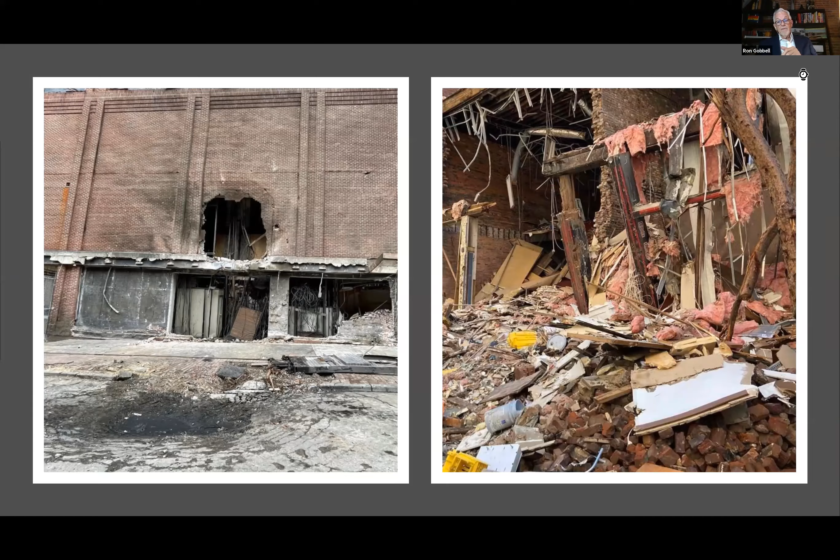Next slide. We've done a lot of work. The property owners, and you'll hear more about this in a minute, are really beginning to get to the terms of what they can do and when can they do it. So there's going to be a lot of things that are coming together.

It's been a little bit over 9 months, and it's a slow process, a lot of damage. So we're continuing to move on. It not only affected 2nd Avenue, but affected 1st Avenue. And again, all of this is coming into play as we start trying to...

Organize how do we make the street better and really make it for Nashvillians. I think the ULI report did an excellent job of articulating that we need a district for Nashvillians.

So next slide. This is the map showing the damaged buildings. Actually, one red building is now turned yellow. So we're making progress. The green buildings are the ones that are essentially back open. Some still have damage. The one I live in still has damage. So every building and every building owner is different.

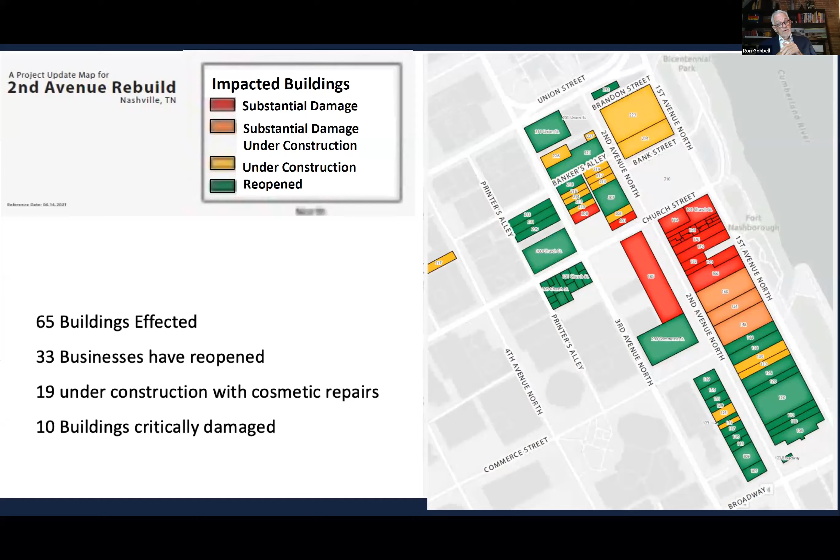And we're making progress out of 65 that were affected. Over half are open, and the construction work is going to be going on literally for the next couple of years. Next slide.

So I think my job is to hand this to Michelle at this point and let Michelle kind of get everybody up to speed. That's awesome. Thank you so much, Ron.

One of the things that I just want to add to what Ron said, the intention for tonight's meeting, we are going to review everything we've heard so far, who we've heard it from, and really show some concepts from the designs for what we're looking at as far as 2nd Avenue, 1st Avenue in the area. So we definitely want your feedback. We'll have a survey at the end. We absolutely want your input. It's really imperative that we hope that everyone is one of the voices that's really going to help shape this area. So we definitely want to share that.

I'm going to go through here real quick, just kind of where we've been so far. So of course, this blast happened on Christmas Day last year. Since then, Metro stepped up pretty quickly and started to conduct some listening sessions. A couple of them where we were really talking to stakeholders, those directly affected, the business owners, merchants, residents.

Occupants of those spaces - those are the folks we're going to call, you're going to hear us refer to them as the stakeholders. We've spent a lot of time and will continue to spend a lot of time talking to them as we refine what worked and what they would like to see in future designs for the streetscapes. We've also talked to the public a number of times, including work sessions.

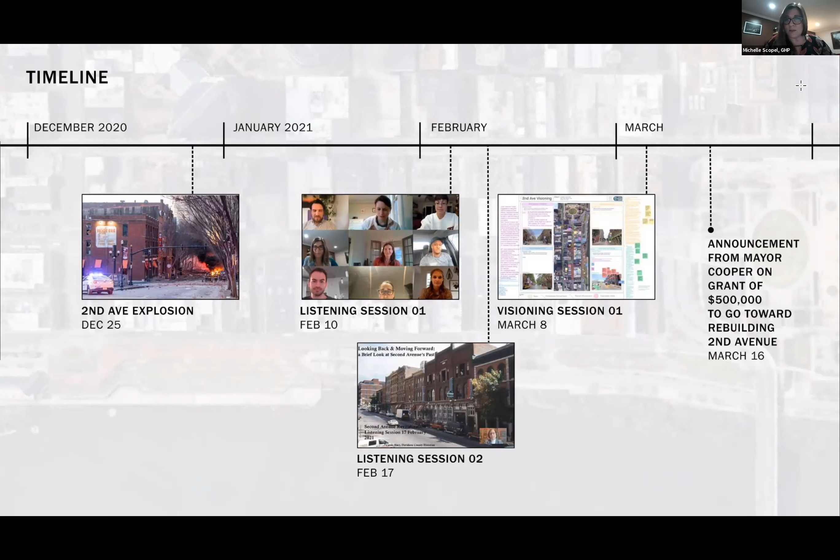It was pretty cool. Also, the mayor pretty quickly provided a grant of $500,000 to help in the beginning stages of the recovery efforts. That's something the mayor's office administration has done. We've had tremendous support from all departments, all stakeholders, council members. Everybody's really been great to work together. The desire here is strong for Second Avenue.

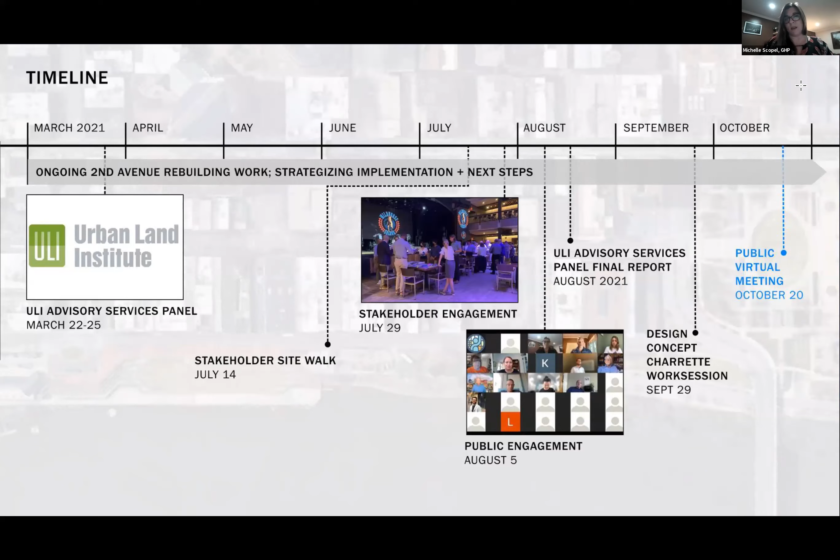So we've held several other meetings. We've done site walks, in-person meetings, more virtual, hybrid, public versus stakeholders, design charrettes. This is actually our 9th meeting since February. So we've heard from a lot of folks.

This is what some of these meetings have looked like, just FYI. If you've been a part of it, we're really thankful for that. A lot of it has been virtual. We've had a media tour so we could help provide a better idea, shed light on what's going on in the conditions of the site.

We've spent time walking up and down the site with the design team and the stakeholders to really hone in on those specifics. A lot of in-person workshops, hanging over drawings, looking at some of the concepts and trying to find out what works and what could be better. So these ideas have really gone towards—we're starting to put that on paper.

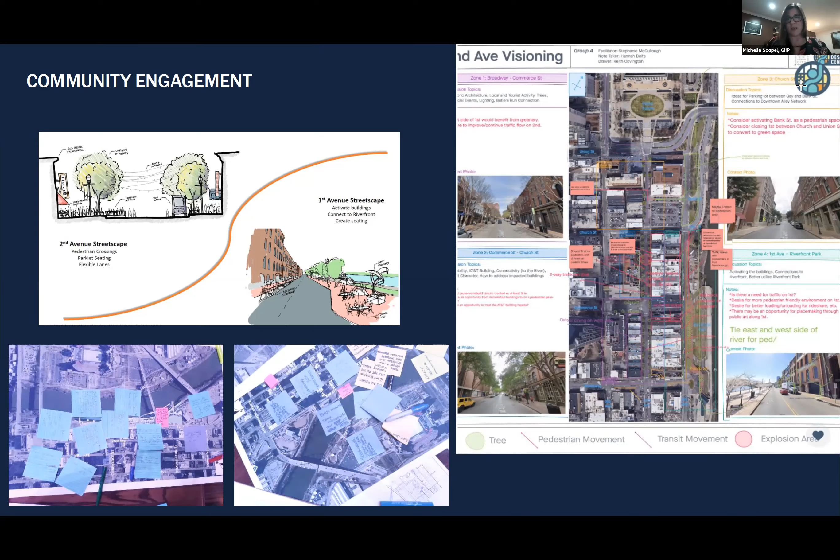It started with Post-it notes and locating areas for improvements along Second Avenue and First Avenue. You can kind of see how the evolution of this is going. We're hearing some messages really loud and clear.

We're really hearing a strong message that people do not want this to be like Broadway. Broadway is great in its own sense, but there's not a desire to expand that up on Second Avenue. People want Second Avenue to be a neighborhood, to have that feel and have a space for the local folks. So the more connection, the better.

The buildings are really deep—try to find something that adds interest along the way. Activate. Lots of ideas and lots of desire to connect to Riverfront and the river with an arcade. So we'll talk more about some of that, but these are some of the things we've been hearing along the way. Eric, do you want to dive into some of the data?

Yeah, gladly. Thanks, Michelle. I'm Eric Hoke, the design director at the Civic Design Center, and we've been helping with a lot of this community engagement effort over the past few months here.

So as was mentioned, this will be our 9th event. We've had over 500 people participate, and that's not even including everyone here today. And then 40 or so, probably more than that even now, business owners and stakeholders and directly affected residents—some of the people who have been involved with the results.

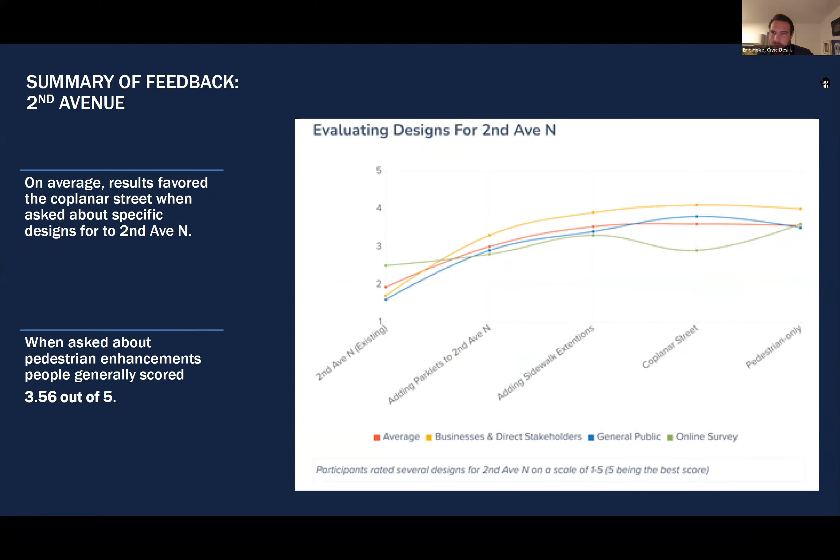So looking at how that related to when we showed actual designs as it related to Second Avenue, people tended to favor the coplanar or shared street example. It was on average the most popular. So it's interesting how we take inspiration from other cities, but when it comes to our street in particular with Second, that coplanar street was the most popular.

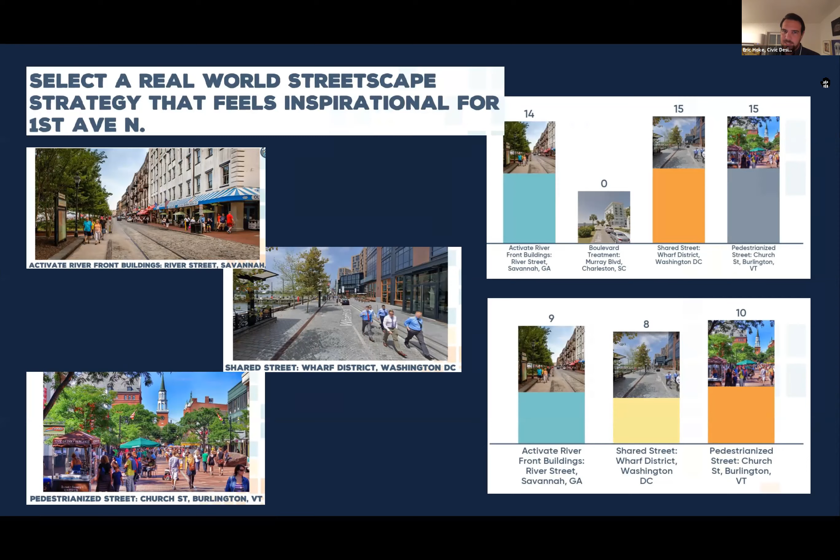And then, so this is a similar slide, but shows the data related to that. And likewise with Second Avenue, that coplanar street was again the favored design on average as it relates to First Avenue.

So overall, we averaged the scores of the general pedestrian feeling, and on average it was 3.5 out of 5 favoring in total the more pedestrian enhancements. I think that's the main takeaway from all the data: this district was favorable to promote pedestrian enhancements.

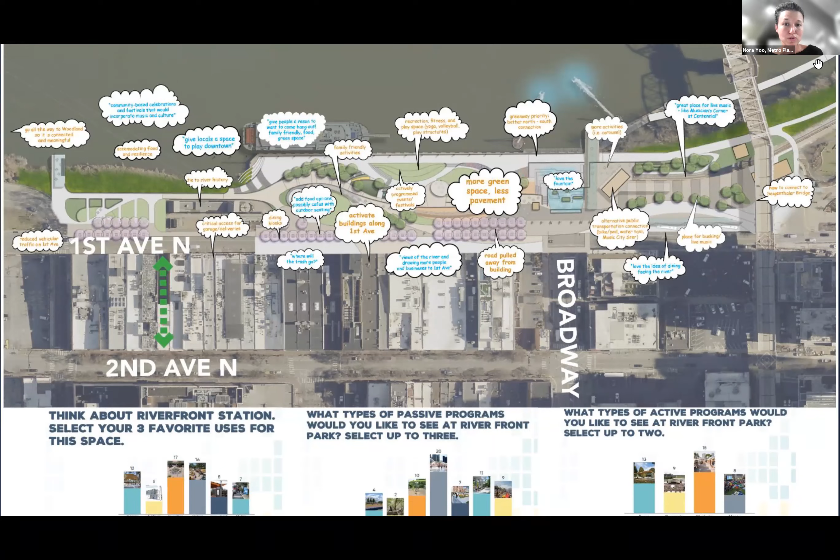So if we go to the next slide, these next two slides were done with our team over at Hawkins Partners, which was great. They helped compile some of the information and feedback that we have heard and overlaid it on these two maps. This one is showing feedback that we had heard on First Avenue and the riverfront, and the next slide shows feedback more based on Second Avenue. But you'll see there's, I think, again, some of the same themes mentioned by Michelle and Eric.

How do we get more green space? How do we make this a space for locals, something of a counterpoint to Broadway? Both the park, the riverfront area, and First Avenue and Second Avenue.

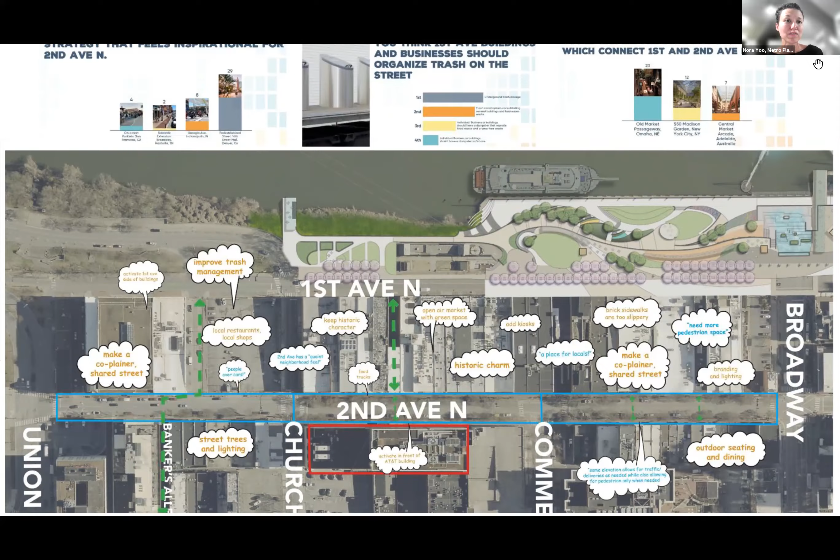That was one big takeaway from ULI: when we talk about rebuilding Second Avenue, it's actually looking at this entire area. It means looking at First Avenue and the riverfront. So we've been working with our design teams on key themes, because when we rebuild the area, we're really talking about a whole district. It's not just this block or these two blocks of Second Avenue, it's that plus the greater area.

These are the key themes that came through both ULI and public feedback. We categorized them broadly into 6 areas: riverfront design, program and activation, and streetscape are the first two, and we'll hear more on those today from our design teams. Then historic integrity, creating connections, property opportunities, and programming and operations of all these redesigned spaces, making them beautiful, well-designed, thoughtful spaces, but also activating them. We understand the importance of that.

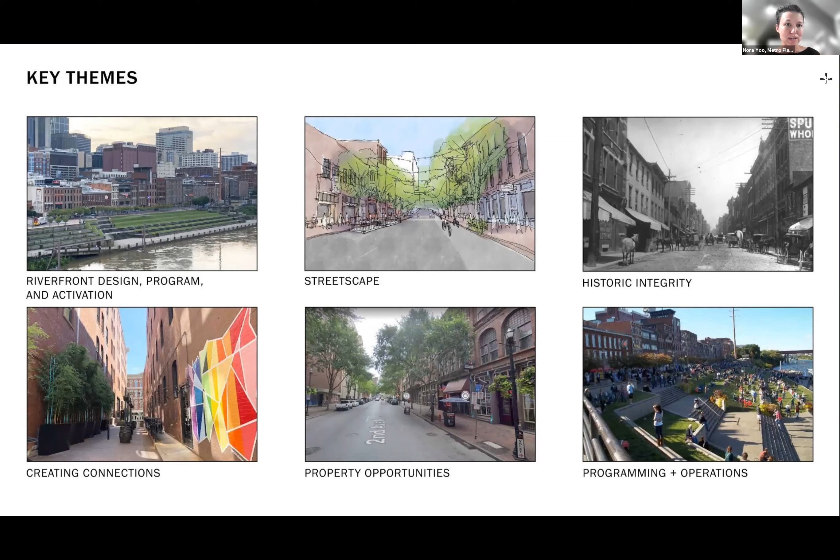Next slide. This shows our key themes, starting to map those out over next steps. We've had GHP leading the effort on immediate reopening efforts, utility work, and coordinating getting the streets back open. But in the mid to long term, this is what we're here for today. We want to talk about the big picture items, broadly put into 3 categories: capital improvements, strategizing and rebuilding properties, and programming and operations.

With the strategizing and building property category, I want to hand it over to Dave Johnston, an architect with STG Design. He's working closely with the owners of properties 170 to 176 Second Avenue, those directly across from the blast. I'd love for Dave to take over and give a brief overview of the work they're looking at as they rebuild those damaged properties. Great, thanks Nora, thank you very much.

Yes, we're pleased to work with the ownership of those 4 buildings. I want to talk today, about 5 or 10 minutes, on what this looks like. Michelle, I think you have the screen.

There we go. So those 4 properties were obviously damaged by the bomb in a significant way, and we can start right there. We know what it looked like on Christmas, and we also know what it looked like across the street, showing the difference between a hardened facility and buildings that were built 140 years ago.

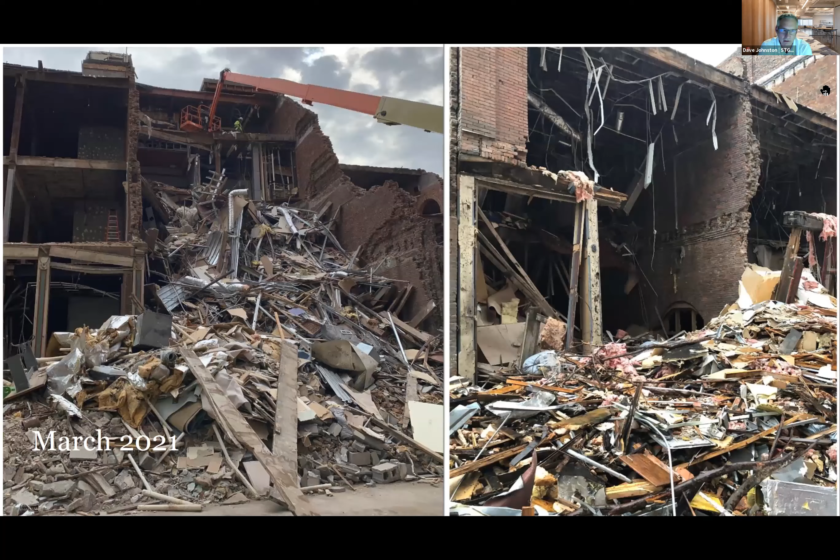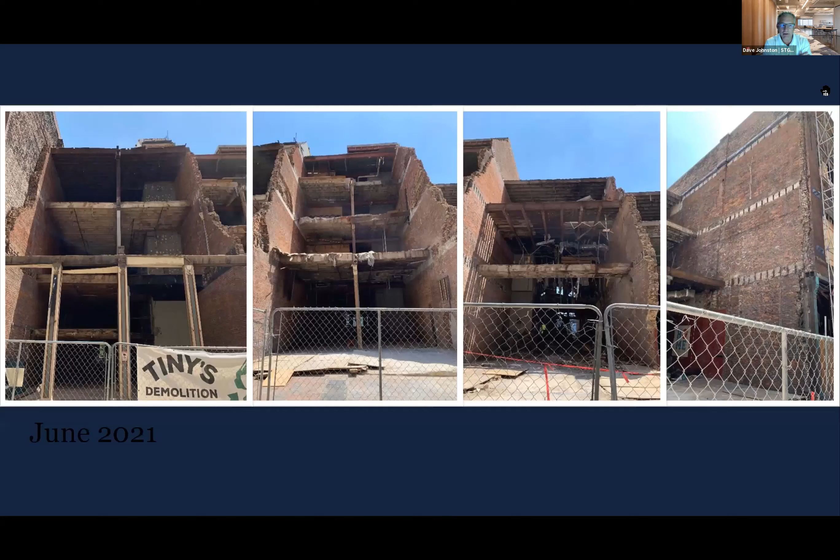Significant impact. The next slide shows what it looked like in March, when all the debris was being removed from those buildings. Keep in mind that under that debris is the rubble remaining from the facades, because they were completely obliterated. Moving forward to June, we see the buildings cleaned out, as Ron showed earlier, and what remained after the bomb impact on the structure itself.

The first thing we need to do is walk through with the Historic Zoning Commission what the next steps are. We met with them a couple weeks ago to talk through how we stabilize the property. There are 3 main components.

The first, the easy piece, is to repair the gutters on First Avenue that were being damaged by water infiltration, so we've repaired those. Second, once we peeled back those walls, we put mortar across the tops of the exposed walls to help stop further deterioration of the masonry from rain and weather.

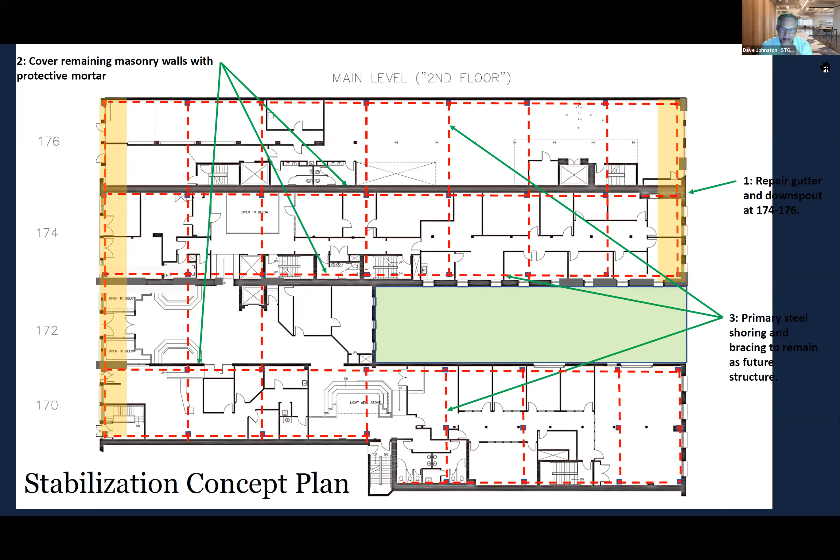Third, the really big component: when you look at this screen, there's a series of dashed lines representing a grid of stabilization. There are two ways to do that: we can stabilize the building temporarily on the exterior, or from the interior. If you go to the next slide, this shows what those walls look like now, where we've repaired the tops of those masonry walls with a protective coating, and the gutters have been sealed up with downspouts on the other ends to stop that.

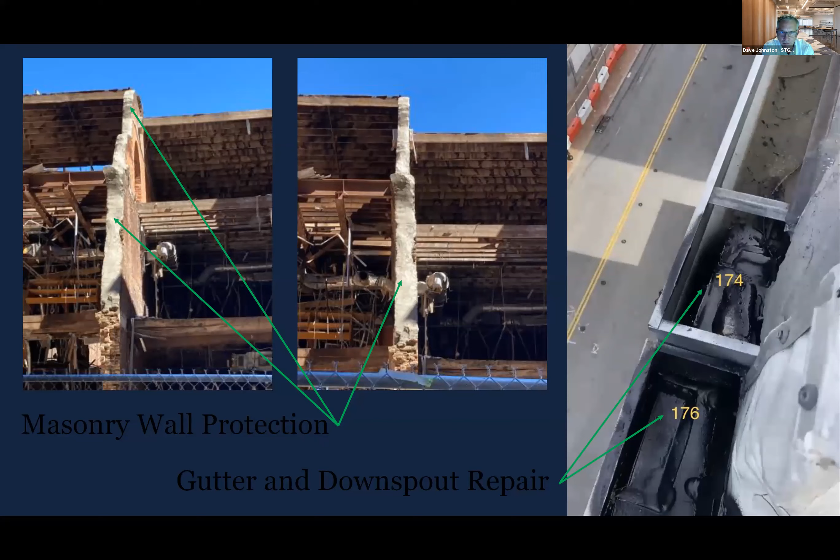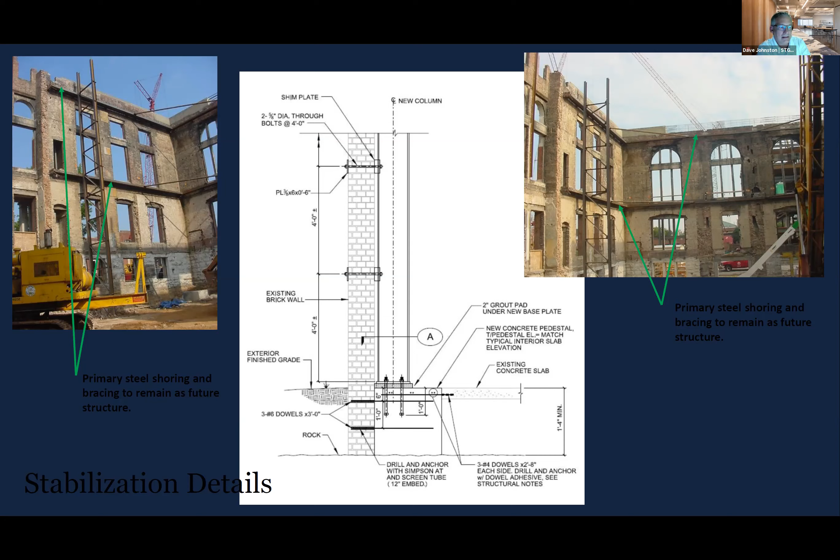Other items such as the stone walls and the brick walls, we're doing everything we can to keep those and repair those, because those are a great value as we start looking at the character of what goes in place of the buildings that are there now.

Now, most of today is about First Avenue and Second Avenue, and how do we make the connection between the two? As we visualize what revitalizing this property is about, the collaboration efforts between Michelle's group, with Ron, with Historic, with Tim Walker, with Cyril Stewart, with Historic Zoning, along with Nora and her group at Planning, and Lucy.

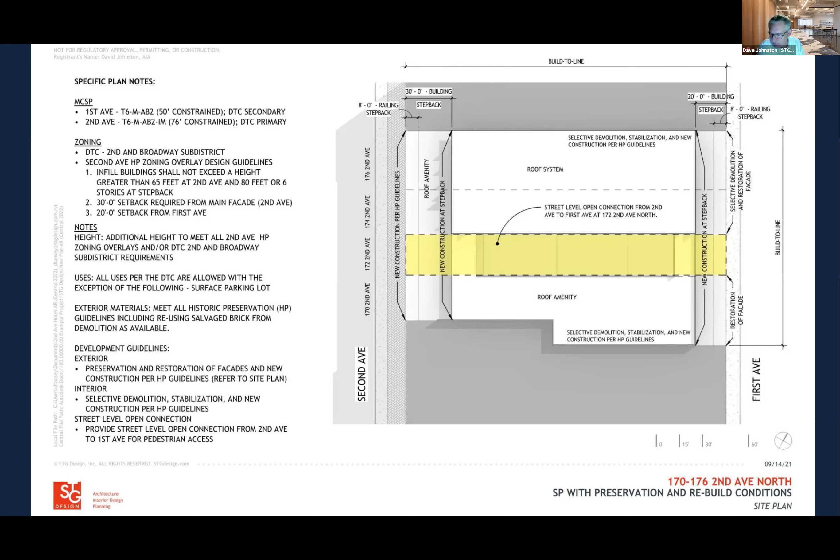So part of the process we're going through is getting approval - we've received approval from the Historic Zoning Commission to move to the next step. Part of that next step is to use what we call an SP, a specific plan.

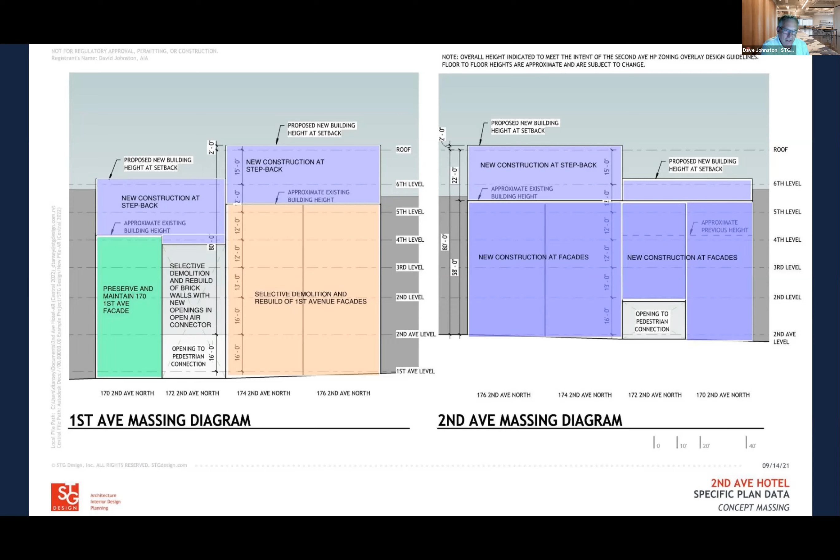By doing that, it allows the owners of the property to disclose what their plans and intentions are for the property to the public. What the owners have decided to do is to actually limit the use of that property - where it is, there is no surface parking allowed.

So we will go back with, as you see, what that Second Avenue facade looked like on December 24th, and try to do as much as we can to recreate that without matching it in a Disneyland approach.

The next slide shows you our concept of what this would look like. Now keep in mind, those are gone - those facades are gone. The owners would like to go back with a 4-story brick facade that matches its neighbors. It's in keeping in material, scale, and proportions with the rest of the buildings, with the addition, if you want to call it that, of an opening that connects First Avenue to Second Avenue.

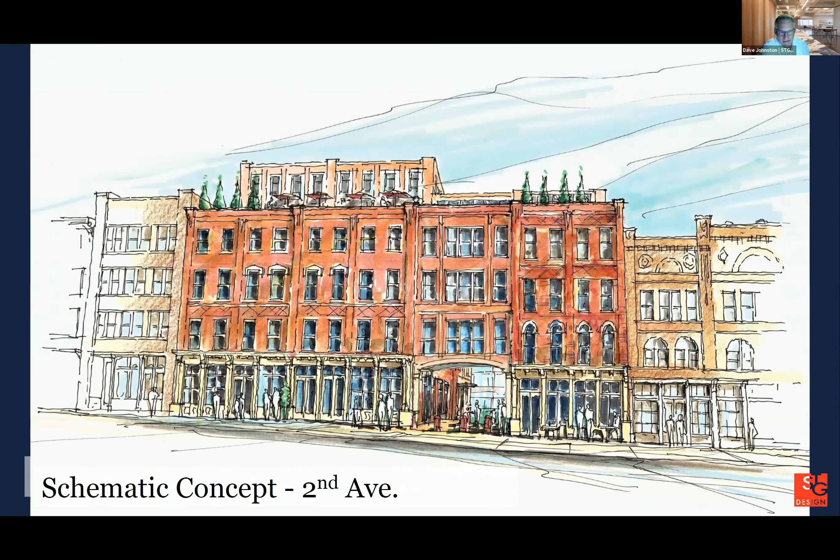That opening is live. It's an address. It's retail, it's restaurant, it could be a pop-up retail shop, but it is an active 30-foot wide strip that goes from First to Second. Now that's a 17-foot drop in elevation, so there'll be steps. It'll be terraced as you go through that space.

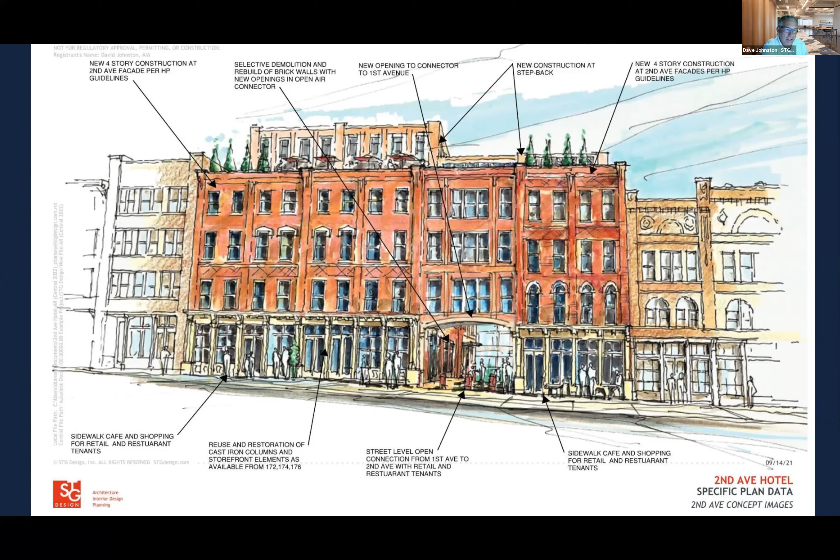Ultimately, what the developer or the owners of the property would like to do is to develop it into a hotel. That's what they've done in the past, in a lot of the properties mentioned before by Eric in Savannah - reusing the materials, the facades across the front, the old cast iron storefronts, to refurbish those and recreate those as much as possible.

The next is when we look at it from the First Avenue side, and there's a close-up of what that connector looks like. These buildings as they exist today, well, say on December 24th, we want to keep that almost exactly the way it is.

The building on the left is 170. We will restore it, put in new windows, touch up some of the masonry work, and keep it just as it is. The two on the right have a severe structural element that is critically damaged, about an 8-inch bow in the building. So we're going to actually take it down piece by piece and then put it right back up with some newer techniques that keep it much stronger.

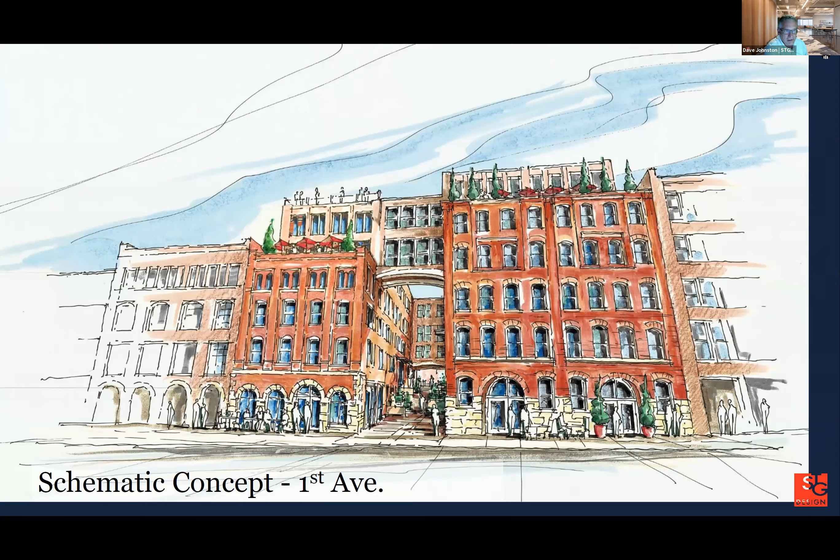It'll last another 140 years. So in essence, you can see it looks exactly the way it did, with the added advantage of another 140 years of service, and opening the street facades up to sidewalk cafes, the connection through back up to Second, and a hotel use. Next slide shows some of the notes about what that could look like, and really as much of the preservation of the materials that we can do.

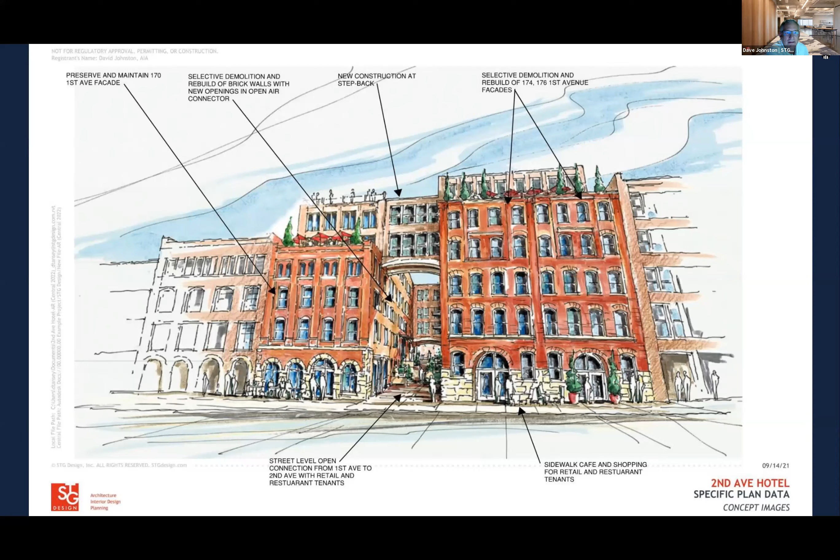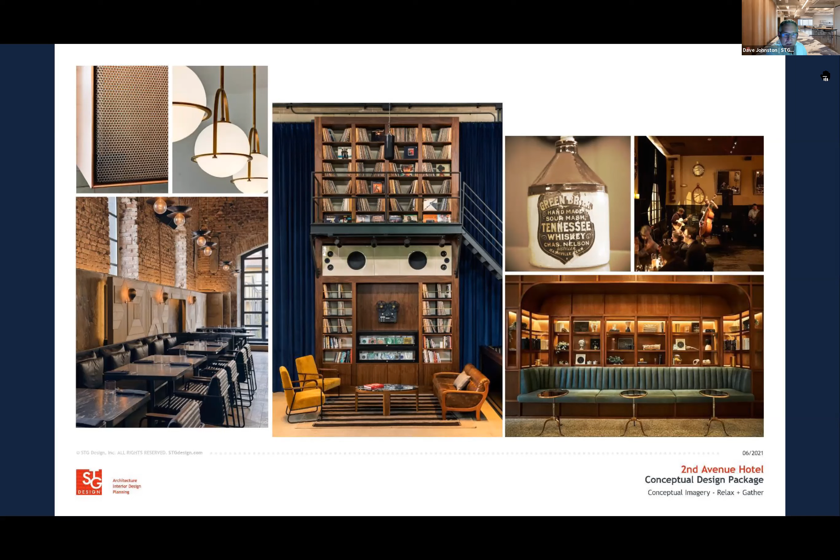When we think about what those spaces would look like on the interior of these buildings, the next few slides go through what those materials would be. It's a boutique hotel, with restaurants and retail that really fits in with the neighborhood. You can see how that starts to reflect some of the hotels and some of the work on 4th and 5th Avenue. It's a different feel than what you see on Broadway, but it still has that natural Nashville feel. We'll call that authentic Nashville.

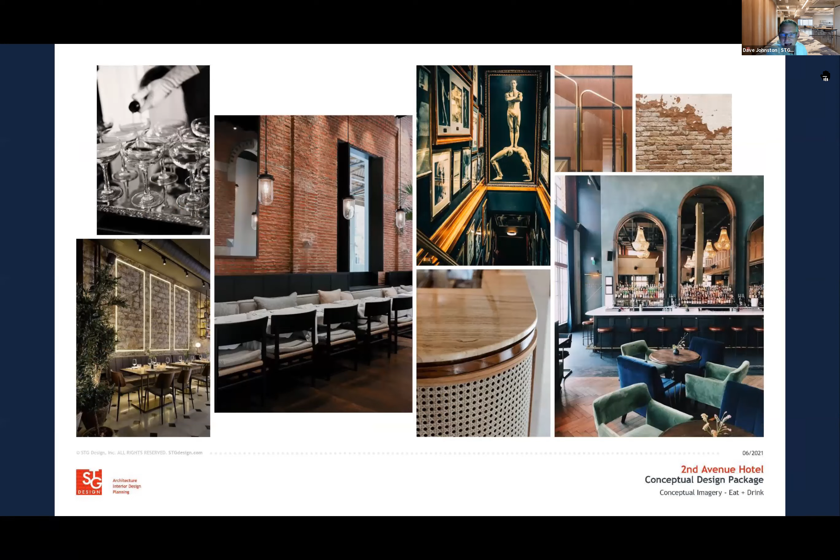So with that, I'll turn it back over to Michelle to talk through the 1st and 2nd Avenue pieces.

Thank you so much, Dave. It's exciting to see that come together.

Just a reminder, some of those key themes that we've heard from the community, from stakeholders, and from ULI are creating connections from 2nd Avenue to 1st Avenue and the Riverfront, activating the Riverfront, activating 1st Avenue so that there's desire to go and play on that side of the street, and then also maintaining that historic character. Going through the process that Dave and his group and the building owners have been going through, they've really been able to keep all of those key themes in mind.

This is a really positive thing, I think. Nashville's really good at turning a difficult situation into something amazing, so this is no exception to that. It's nice to see. We want to spend a moment and introduce the design team.

We've talked a little bit about these designs. We're going to get right into 2nd Avenue and 1st Avenue, and then moving into the park area. We want to introduce Kimley-Horn. They've been an instrumental part of the conceptual stages here, and it's been really great. We've had folks from both the Atlanta office as well as the local office.

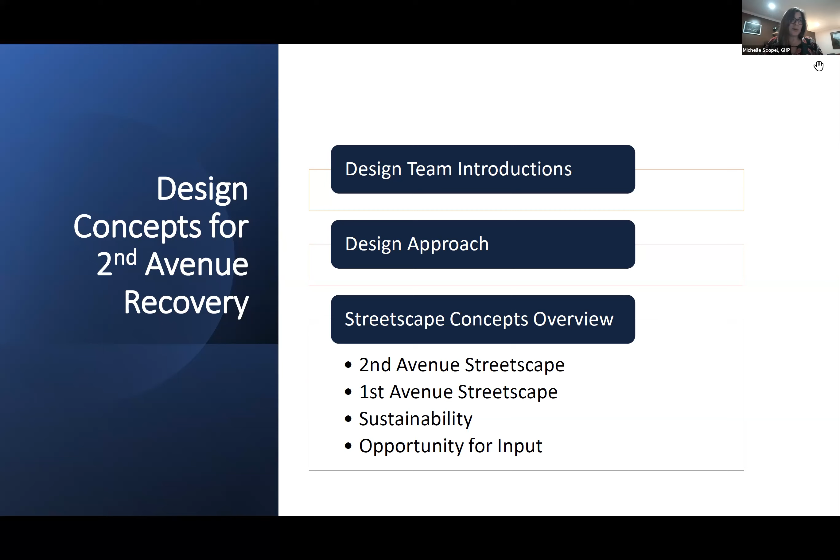We also have Hawkins Partners, which most of you probably know and love. Kim Hawkins and her team, Nathan Oliver, have been wonderful and will continue to participate in a lot of the visioning for this. And then, of course, Tiffany Wilmot Inc. has been included, providing the sustainability design, as well as a lot of conversation about trash and waste management. That's something that, in order to activate First Avenue, is a huge component that needs to be solved and reworked, so that's a really important conversation that will continue to go on.

So I'd like to kick it over now to Eric Bossman with Kimley-Horn. Great, thank you so much, Michelle, and thanks everybody for joining us this evening.

This really is exciting now to be able to take all this fascinating and wonderful input that you've gathered over the last 10 months and now start to put some visuals to it for what Second Avenue, First Avenue, and the Riverfront can become over the next coming years. You've heard a lot of the background this evening about the input that's been gathered, and that really was our starting point as we looked at how do we recover and rebuild Second Avenue, how do we take all of the design input and those concepts and put it into words and designs that start to bring Second Avenue back to life.

How much of this street, Second Avenue specifically, historically had 4 lanes—2 lanes of parking, 2 lanes of traffic given to automobiles—and about 28 feet of the street given to pedestrians and sidewalk activities. How do we rethink that in a way where we really maximize Second Avenue for pedestrians?

You heard Michelle say it, you've heard Dave reference it as part of the architecture piece. How do we make sure that we maintain the celebration of the history of Second Avenue? That's both Second Avenue's founding as part of the birthplace of Nashville, but also the recent history we've experienced. How do we continue to maintain that traditional architecture, that sense of place, but also recognize Second Avenue's role within downtown and the greater Nashville area?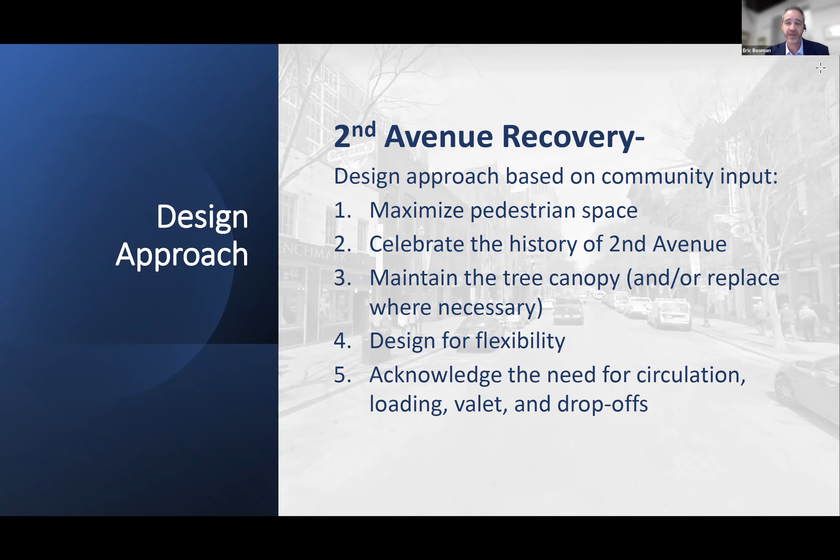While there was a tremendous amount of conversation about whether we can do a 100% pedestrian street 24/7, 365, in meeting with a lot of the local business owners and operators, we have to acknowledge there's a need to maintain some level of circulation, as well as loading, valet, and drop-offs on the street. Now, while we recognize the need for all of that, we also think there are ways we can tweak it. And you might notice that on-street parking is not included in that list. So that's something we'll talk about this evening as well.

So what I want to do is walk you basically through some design options and alternatives that are currently under consideration. And then later in the evening, when we get to the Menti, we're going to get your input on some of the elements of those different variations within the alternatives.

Now, if we start at the South Block, so Broadway is on your right, Commerce Street on your left on the graphic. If we went down and said, how far can we go with pedestrianizing the street? Well, we may be able to make it a pedestrian street and close it down for some periods by putting in some methods that we can close it down on a temporary basis. But if we're going to maintain the opportunity for flexibility, for adaptability, and frankly for public safety, there's probably a minimum level where we need to incorporate at least the opportunity for 2 travel lanes.

Now, we think in looking at some of the traffic numbers that the street really doesn't need 2 travel lanes all of the time. And in particular, if you're going to close down the street, obviously sometimes those won't be travel lanes. In the most extreme sense, we think you could probably do it in a way where you've got one lane dedicated to travel and maybe one lane that's a flex lane. And that becomes your loading zone or your valet or your Uber/Lyft drop off.

Regardless of how far we go, we definitely want to tame the street and give back more space to pedestrians. So even if we maintained 24 feet for 2 travel lanes, whether they're used as travel lanes or not, that gives us the ability to widen our sidewalks from about 14 feet today to between 20 to 25 feet on a permanent basis all the way up and down the street.

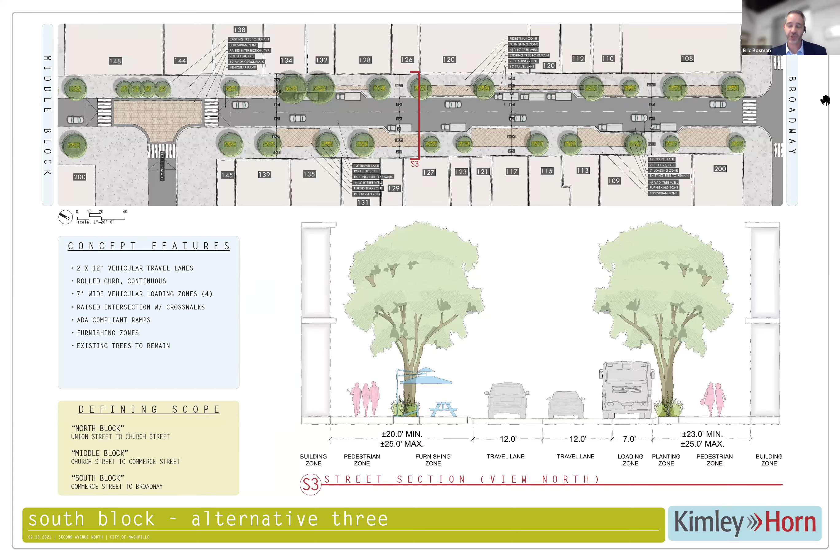So the next image shows basically what 2nd Avenue looked like the previous year, and then with these considerations and design concepts that we're talking about, what it could look like in the future.

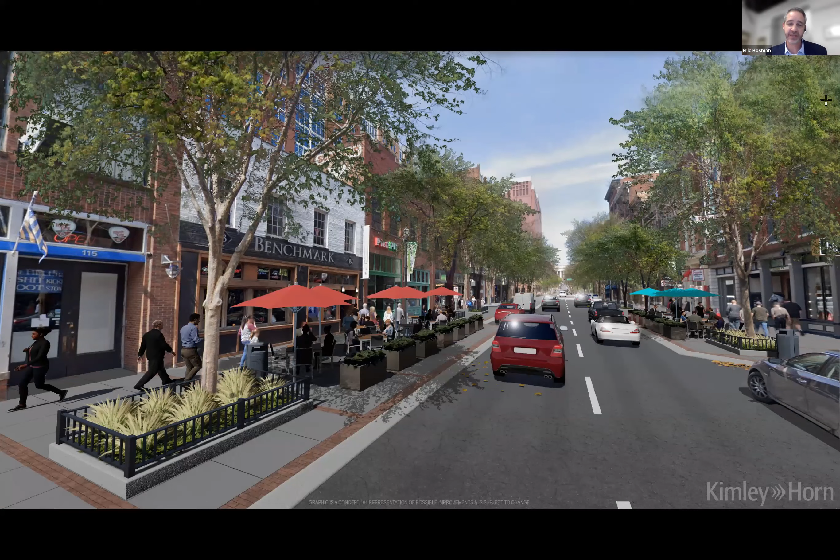Again, we're trying to narrow these lanes as much as possible. Eric talked about the potential for a co-planar street. That is an option here. We do have some stormwater issues that we need to work through. So even if it's not co-planar, what you're seeing in this concept drawing is actually an angled, not quite a rolled curb, but sort of an angled curb that sort of provides that same sense that the sidewalk is more closely aligned to the street level, so that when it is closed down, there's the opportunity to create that pedestrian space. But again, maintaining flexibility as we go through the options.

So that's how we've started to translate some of this information into the south block. When we get to the middle block, we actually think there's a pretty exciting opportunity, because the west side of the street, the left side or the bottom of the plan graphic that you're looking at, has a lot of the AT&T buildings that do not have street level activity. We actually think there's an opportunity to move the street a little bit to the west, particularly when we're narrowing it down. We can move it to the west and actually further maximize the sidewalk space, the sidewalk dining, the activity on the east part of the street.

And with the architecture that you saw previously and the ability to create this cut through between 2nd and 1st Avenue, we think there's also an opportunity to create a public plaza or public space in the middle of the block. We heard many business owners talk about that even prior to the events of last year - a lot of the activity starts at Broadway and might make it up to Commerce, but then when you go from Commerce to Church Street, the activity really drops off pretty quickly. We believe that creating this urban plaza not only will create this moment that calls more attention to the crossover between 2nd and 1st, to some of the recent history that's occurred in the area, but also create a focal point that will draw more individuals, more patrons up the street, further into 2nd Avenue, and bring more attention to the businesses and the opportunities that are there.

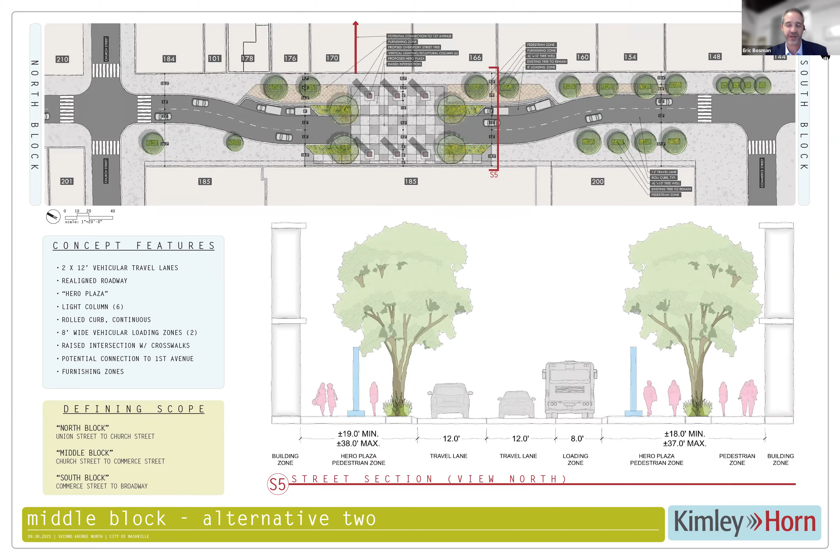Now, at the end of the day, the curve may not be as severe as what we're showing here. What we're talking about is really moving the street to the west. There's a variety of different geometries we can use to do that. We just have to meet up at Commerce and Church to make sure that our alignments work. And if you don't like that particular look, the plaza is definitely something that is open for discussion and further design consideration - taking part of an arched approach, part of a more geometric square approach that maybe has some light towers or light elements within it. We've got two more on the next slide that go into different ways to begin to look at and conceptualize and design.

So the plaza is far from finished. Part of the input we want from you tonight is whether the plaza is a good idea in creating that public space within 2nd Avenue - this point of remembrance, but not remembrance of a negative thing that happened, a celebration of the spirit, the enduring spirit of Nashville and of the people of Nashville that are embodied in what is being recreated and rebuilt along 2nd Avenue.

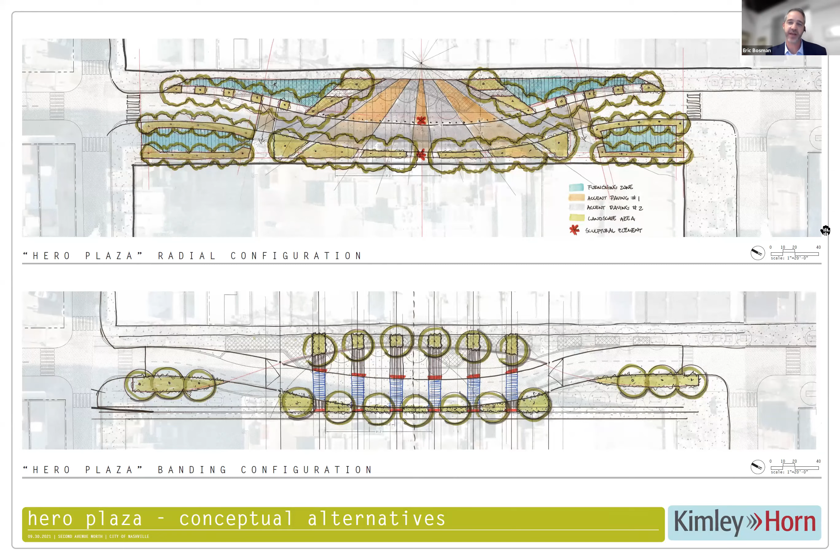So in addition to that thought for the plaza, as we go to the north block, we start to return again to some of the ideas that we talked about on the south block, narrowing the street as much as possible and widening the sidewalk environment.

We also think the porous nature of 2nd Avenue and being able to reconnect it to First and the riverfront is so important. Bankers Alley and Bank Street provide another opportunity to do that, where we could potentially provide a raised intersection that not only slows the traffic and calms what few cars will be there, but really creates this pedestrian moment and pedestrian space across the intersection.

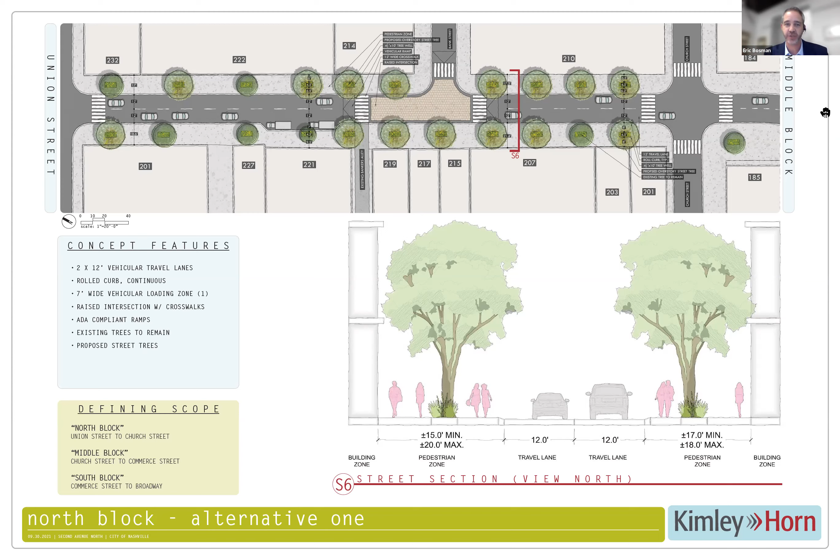We could also do that treatment at Commerce and at Church Street as well, where we raise the intersection and again change the balance between vehicles or any motorized aspect and the pedestrians whom we're really trying to create the space for.

On the north block, there are 6 trees that remain. In order to really reestablish that canopy, we could actually replant the north block entirely, and by doing that, move the trees a little out towards the center line. The sidewalks are actually much more narrow in this north block than in the other two blocks.

So the second alternative for the north block replants all of the trees and moves them in towards the center line, again trying to create that sense of canopy and maximizing the space for pedestrians.

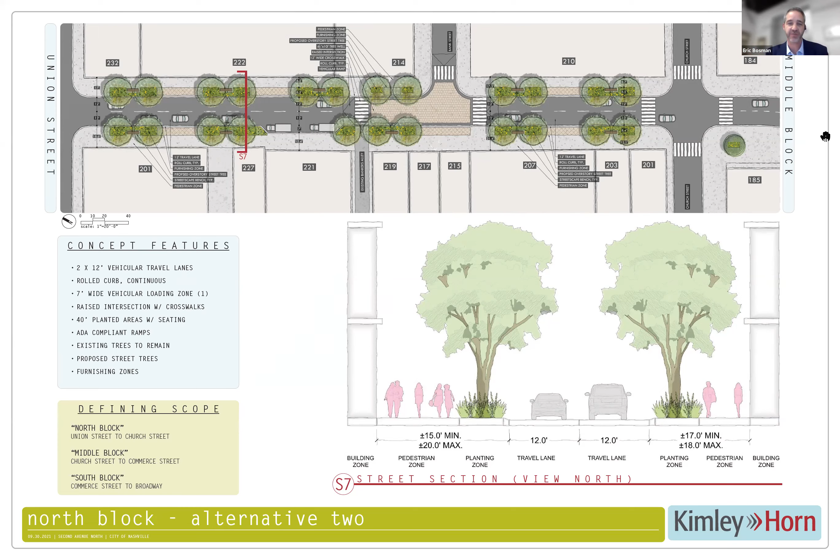So that's a little bit of the progress that we've made in translating some of the design input to 2nd Avenue. Again, I want to highlight as I hand it over to Nathan to talk about what's going on with 1st Avenue.

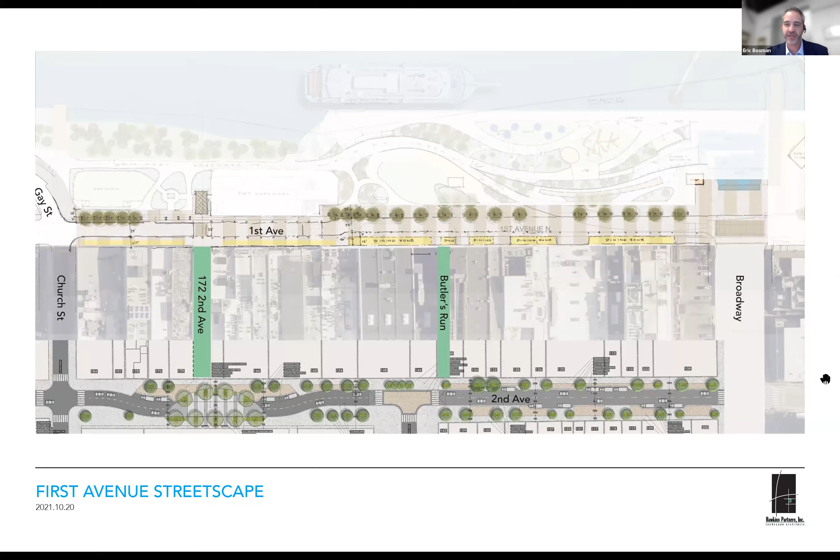The idea here is really not just a single corridor. This is about transforming this entire section of downtown, linking the riverfront to First to 2nd and through Bank Street, with the proposal of 172 2nd Avenue and Butler's Run, the opportunity to really create a greater sense of collaboration between 2nd Avenue and the environment on 1st Avenue, and create a destination in downtown Nashville that builds off its historic presence but is very different from the Broadway environment and caters to a very different population within the city.

Nathan, you want to take it from there and talk a little more about First?

Yes, thank you, Eric. It's great to be with you all here tonight. My name is Nathan Oliver. I'm with Hawkins Partners, and we've been working with the rest of the design team and the project team, really looking closely at First Avenue as part of this work.

We've taken a lot of the feedback that you all provided throughout this time, throughout all these different public meetings and engagement opportunities that we've had. A lot of those were mentioned in some of the work that Eric was describing, and we took some of those and really looked at First Avenue, applying them in a way that can make it a more transformative space.

Some of those themes that came out were: dining facing the river, a pedestrianized street, an environment that's much more about walkability, pedestrian safety, and connectivity in a way that really activates First Avenue.

As Dave mentioned, these buildings are really unique because they have two fronts. Front Street, or First Avenue, is really an opportunity to front Riverfront Park and the river. So as we begin to look at the opportunities, there's a chance to really think about activating these and allowing them to be more of a front.

And so what this concept shows is, what we heard was: let's look at how we can pull the street away from the building to create a pedestrian experience along the building, where we can provide opportunities for that activation to take place.

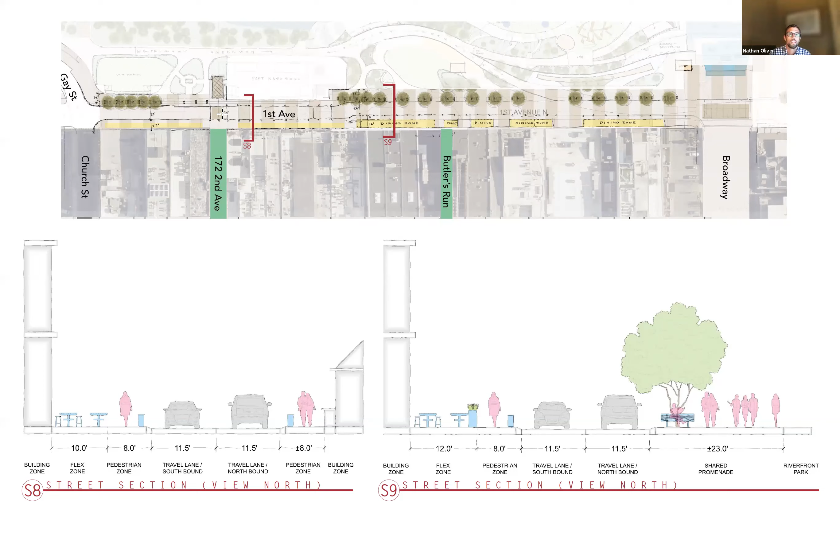So as we begin to think about what can happen within these spaces, you'll see that flex zone we were just talking about described in a little bit more detail. Begin to think about some of the uses that can occur along this facade and things that will begin to provide that activation in a way that the building can really start to engage the street and the pedestrian engage the building as well.

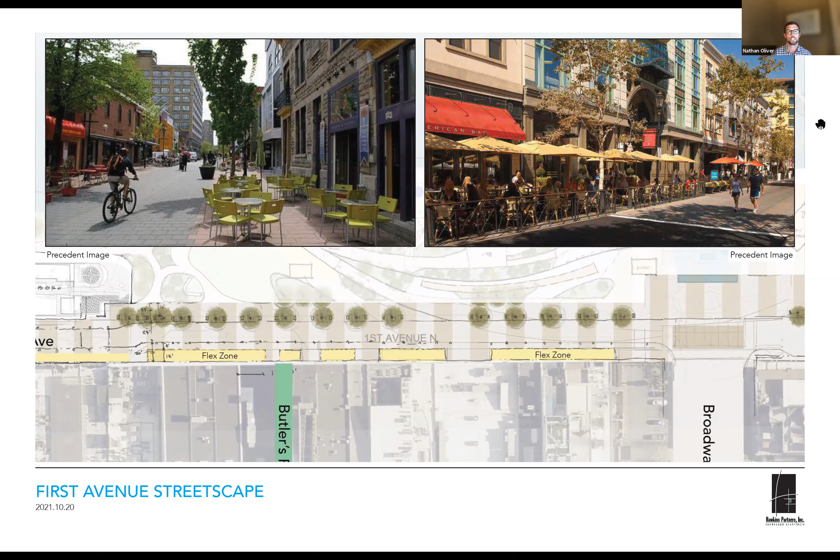And then Michelle, you can go to the next one.

And then again, this is really looking back at the work that Dave talked about and that connection of 172 we were just speaking of. Again, thinking about some of the opportunities to create an atmosphere and a character along here that's really representative of a lot of the things that we heard and a lot of the things that people are looking for, and how they want First Avenue to really embrace this idea, this block and this active node here right in the heart of Nashville.

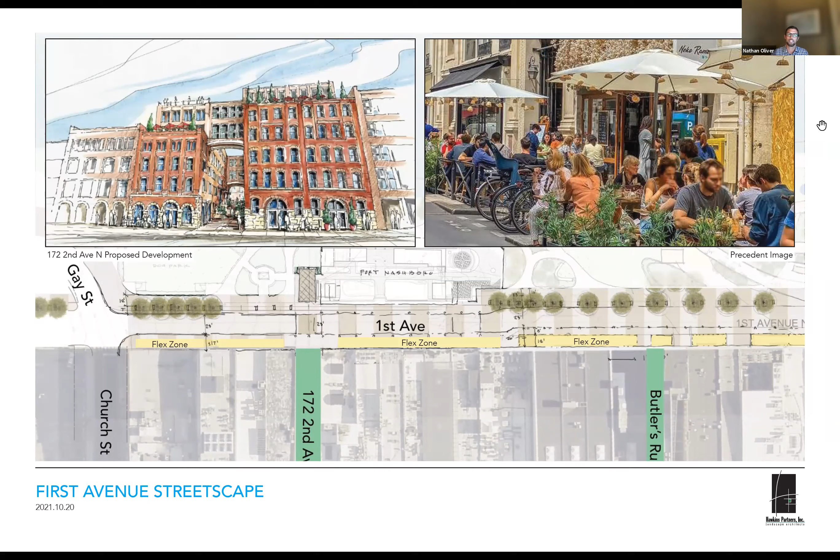All right, and then one more.

And that can come in a number of different ways that we think about the treatment of First Avenue, the pavement type, as Eric was talking about, opportunities of a rolled curb, opportunities that were spoken to earlier of a coplanar street. So those types of ways we need to change the character of the street, change the way in which the vehicle interacts with it, and start to prioritize what we all have been saying and hearing during this whole experience: it's about the pedestrian and the people that are within this space.

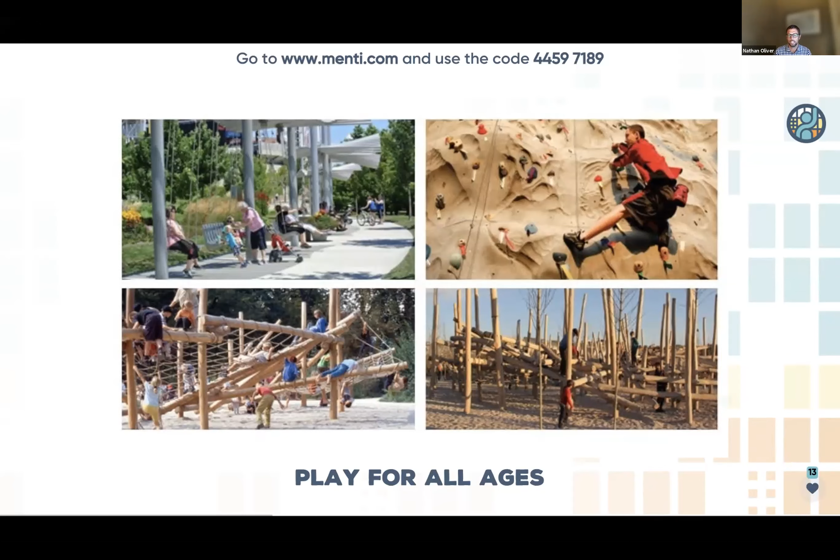So the first that we heard: play for all ages. This can mean a number of different things, but at the heart of it, the bottom line is that it's a space that all ages feel is playful and engaging. That could mean a climbing wall, these climbing structures you see, it could be a slide garden, it could be swings, or a number of different things. We're not at the point of really defining what that is, but play for all ages was one of the themes.

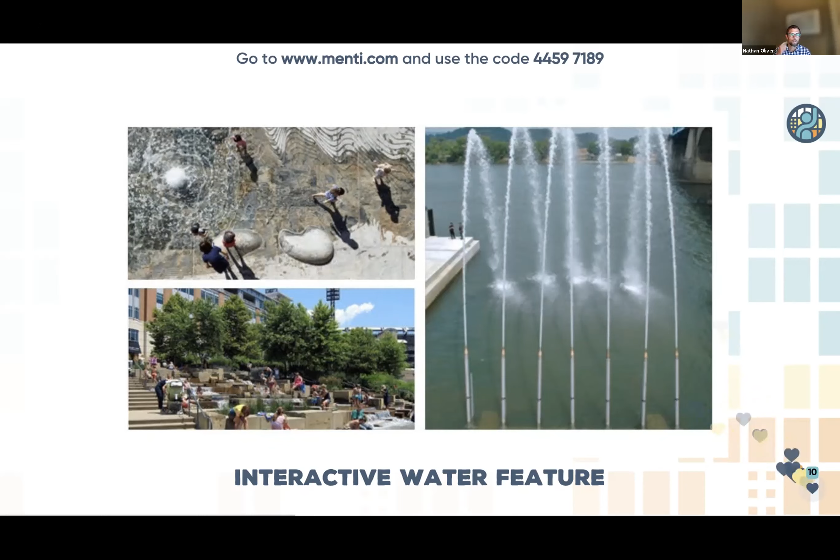Interactive water feature was another one of the major themes—some type of space that allows you to engage and interact with the water in some way. This is showing kind of a bubbling feature on the left, the bottom left is a terracing of different pools, and the one on the right is more of a fountain. So just some type of interactive water feature or water element within Riverfront Park.

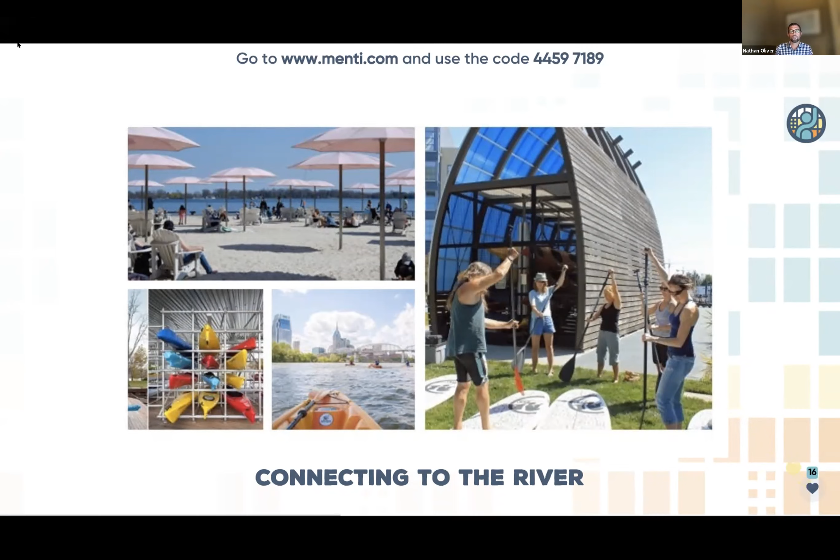Connecting to the river—we heard connection to the river as a really major theme. This particular one is opportunities to connect to it visually, whether it's the way you're positioned and fronting it on some beach or lawn element, or whether it's actually ways that you could paddleboard or kayak from or to the riverfront. It could be an opportunity that you could paddle to the riverfront, put your kayak in a bin and spend some time in the area, or depart from that location. But this is connecting to the river.

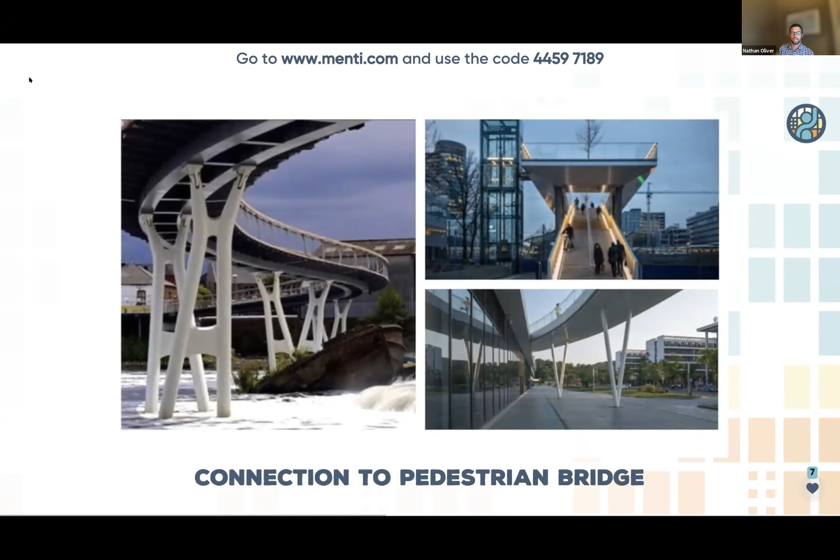A connection to the Seigenthaler pedestrian bridge. This is the idea that there would be a way to get from Seigenthaler pedestrian bridge down into Riverfront Park, directly connecting Riverfront Park to the pedestrian bridge. Again, these are just 3 pedestrian bridges just to get your thought and mind in the right space.